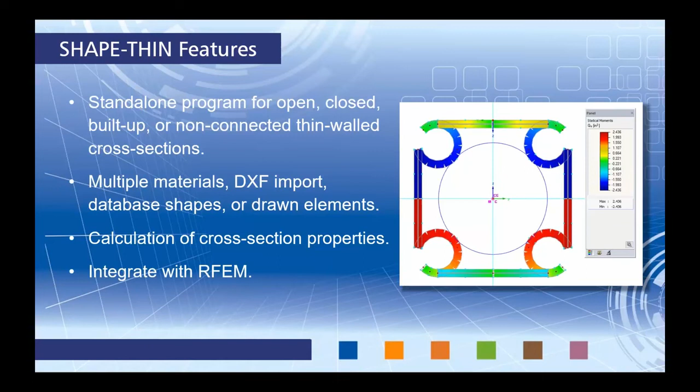Now you can create custom cross-sections with multiple materials. We can import a DXF file, which is what we'll do today. You can choose database shapes to create a built-up section, like from the AISC, the ADM, the CSA standard, or you can completely draw your elements yourself. Now the purpose of SHAPE-THIN is to calculate the cross-sectional properties, and then from here we integrate this custom cross-section into RFEM with our full structure.

Our other program, RFEM, is our finite element analysis program. This is where we'll be completely doing all of our modeling. Now, the modeling includes almost every material. We also integrate with BIM software such as Revit, Tekla, AutoCAD. You will load the structure and you can completely analyze it. From the analysis, we can get design internal forces, deflection, support reactions, and with this, you can take that information and utilize your own tools such as Microsoft Excel, for example, if you wanted to take that a step further to do design per a specific standard.

Now within RFEM, we can also utilize the add-on modules such as RF-ALUMINUM ADM. This has to do with a specific standard and providing you that code check. So for today, for example, we will take a look at the strength limit state design for unwelded elements according to the ADM standard. But we can also check serviceability limit state design. And with those two design features, we will input a lot of other information specific to the ADM standard that we haven't already entered in RFEM, such as unbraced lengths, limiting deflection ratios, and lastly, we can optimize the members.

So with that said, we can immediately jump into our first program, SHAPE-THIN. So with SHAPE-THIN, I want to go to File, Import, and this is where we can import a DXF file. So you just simply navigate to the file and click Open. Now, the first thing the program asks us is to create a cross-section name. And there are three different options down here. The first is the plastic cross-section properties. I will leave this checked, so the program will automatically calculate this with this custom section.

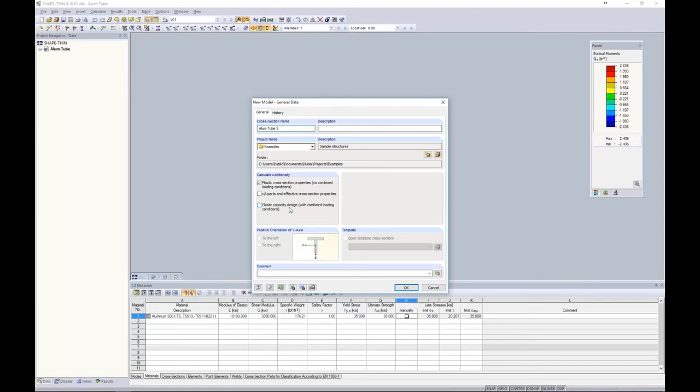The c/t parts I'll get into a little bit later, so we'll come back to this. And then the plastic capacity design really only has to do with Eurocode, so it's not relevant for the US or Canada, so we'll just leave this unchecked for now. So when I click OK, I should see my dialog box that imports my DXF file. Now, for the DXF template options, I want to choose the correct dimensions, which would be inches here. That's what my DXF file was created in.

And here would be my file from exactly the import. Now we also want to specify a reference material. So for this I can import a new material from my reference library, and you can see over on the left we have our filters.

For today I'm going to filter to metal, to aluminum, then we can filter to the ASTM, and here we have the ADM 2015. Now we have a very long and complete list of every ADM material you could possibly think of. What's also useful is to utilize your favorites group. If I check my favorites group, I've added a single material here that I can quickly access. Let's say you have several materials you access for several projects. You don't want to sift through that long list, so you can create a favorites group.

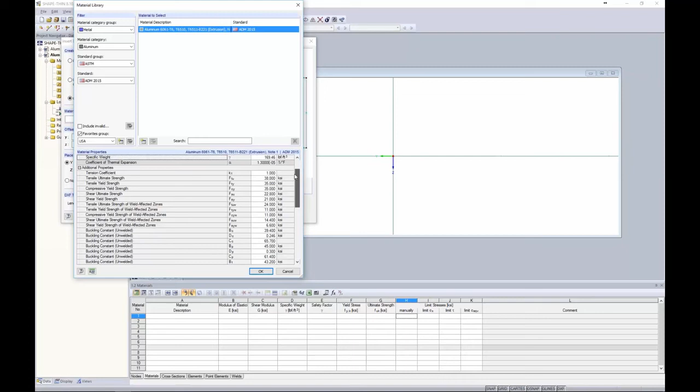For today, for this custom cross section, we'll use aluminum 6061 for extrusions, and you can see all of the material properties are given here. I click OK, and the next thing to do would be to click on a single point in this dialog box here on the left and where we want to insert it within the SHAPE-THIN program.

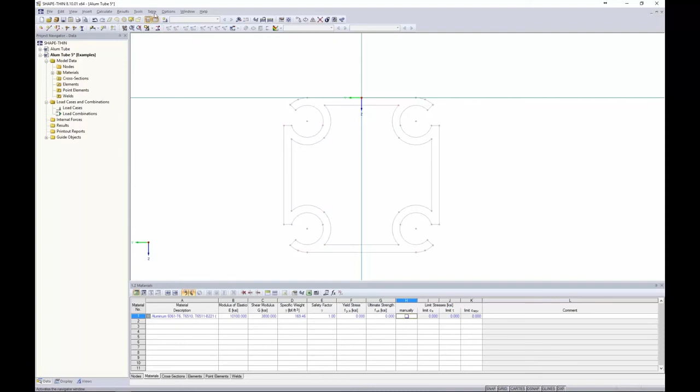So once I'm done with this, I can right click, I can expand this window, and we are now within SHAPE-THIN. So those of you who are familiar with RFEM or the other program RSTAB, the interface is identical to those programs, which is nice. So you're not having to learn a completely different process. Down here we have our tables to work with, we have our project navigator on the left, and we have our quick access tools up here at the top.

So this DXF file is just simply a background drawing grid. So what we need to do, though, is to draw these thin-walled elements to essentially create the shape of the custom cross-section. But we have quite a few features within this program that allow us to do that rather quickly. Now, the first option we want to go to is this new line up here in our tools. We have a straight line selected here, but I'm going to select a thickness of 0 inches. So all I'm going to do is to snap to one of these points on my arc and snap to the other point that's perpendicular to it.

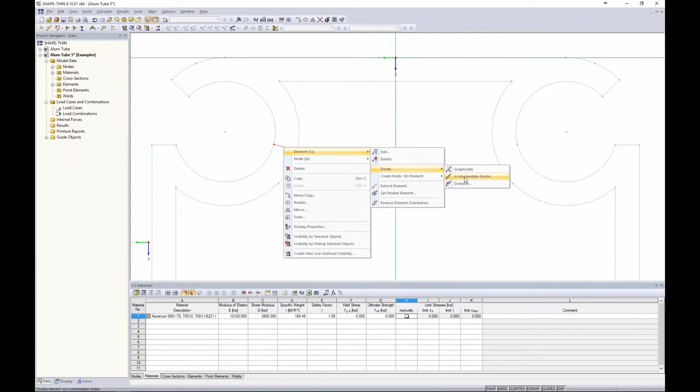Now, there are a lot of AutoCAD-like features such as snap points, perpendicular, parallel, that allow us to utilize these features quite nicely. So once I have drawn that, I'm going to highlight this element, I'm going to right-click, and I'm going to divide it by n intermediate nodes. Here I'll divide it by one intermediate node, and that immediately creates a center node. So now I can delete the left and right portions of the line, so I'm just left with this single node here.

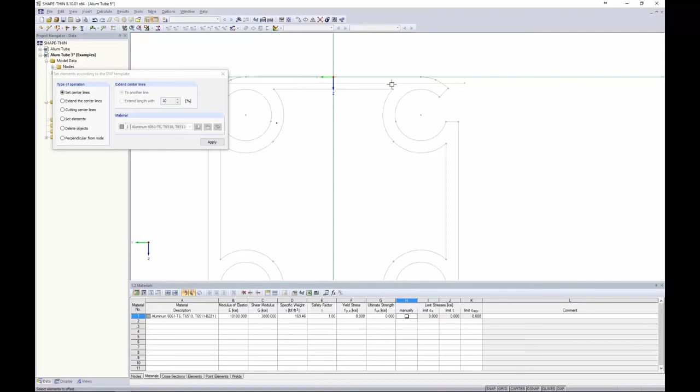Now, another feature under Edit, Set Elements with DXF Template. This is extremely useful. This has a lot of different operations that we can utilize to, again, just help us create these thin-walled elements that comprise our custom cross-section. For example, the Set Center Lines. With the Set Center Lines, all I need to do is to click 2 lines, and the program will automatically create a center line within that DXF file template. Now, I can do the same on all 4 walls here, and the program will automatically create them. Now if I right click, I exit out of there.

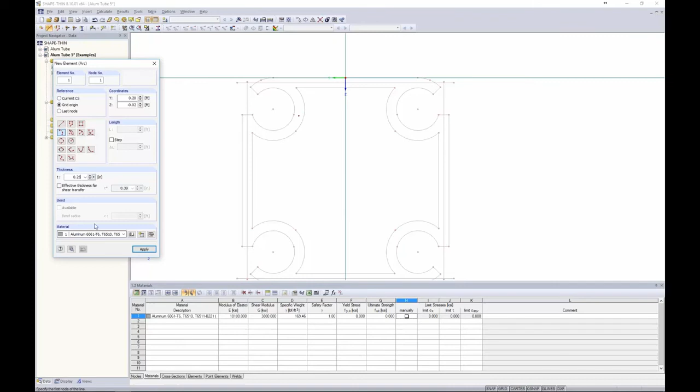So let's begin drawing our elements. What I can start with is a new line again, but this time we will choose an arc via 3 nodes. Now I do want to give it a thickness of 0.25 inches. Now my reference material is already selected here, but if I did want to change it, I could do so. And if I zoom in, I will select the midpoint between my 2 end nodes. My second point will be that node that we created right there in the middle, and then lastly we can snap to the end point here. If I right click, now I have created that arc element on the left corner.

In the similar fashion, we will choose a straight line. The thickness is remembered, 0.25 inches, and we can just snap to the center line of that DXF background layer that we created. And we will snap to any single point on our arc element there. Now the program's smart enough to recognize overlapping elements, so we don't need to worry about accounting for stiffnesses twice or anything like that. The program is smart enough to recognize that. Now we'll do the same thing at the bottom, and we'll snap to the top.

Now we could do that same process for all 4 corners, but rather we can select everything. And actually first let me utilize this tool Connect Elements up here at the top. Now the Connect Elements will make sure that all of these elements are connected to each other by placing a node on overlapping elements. So now we're going to select everything and utilize our mirror tool right next to that.

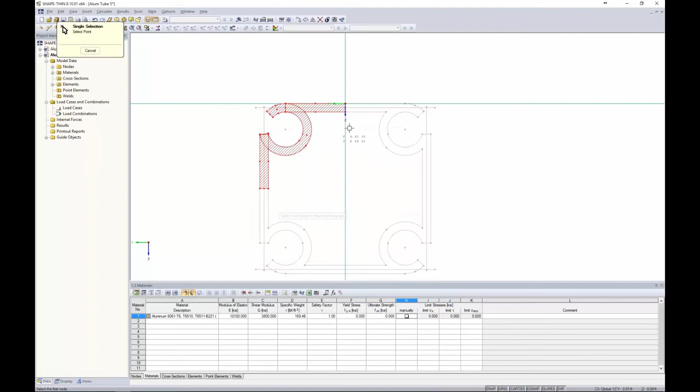With the mirror tool, we'll create a copy about the global z-axis, and then we just simply click a point graphically that we would like to mirror it around. We click OK, so now we automatically have that right side created. I will select everything in the upper half utilizing the mirror tool again, but this time about the y-axis, and I graphically select a midpoint here, and I click OK. So essentially that's all that we have to do to create this custom thin-walled section.

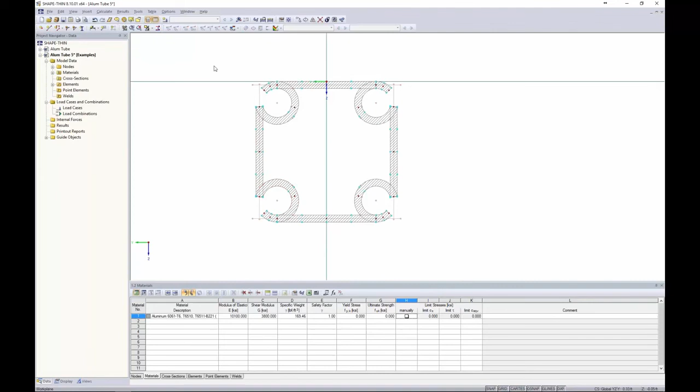Now, if I'm ready to calculate my cross-sectional properties, I can go up here to show results. The program says, okay, should I start the calculation? Yes, and immediately I get an error saying FY is not positive. Please check this in the table. So the program jumps to the problem where this error was being flagged, and I immediately see that my yield strength and ultimate strength are set at 0.

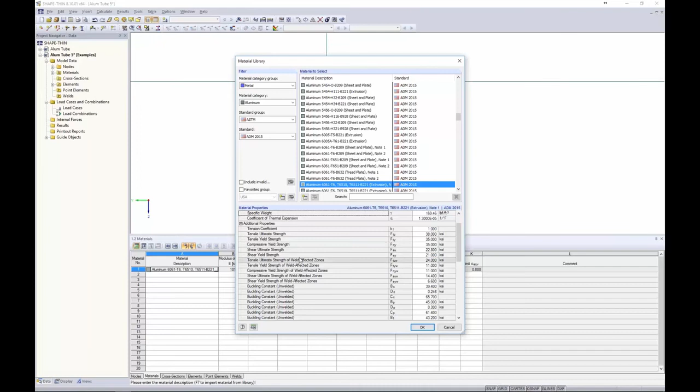Well, why is that? Well, when I take a look at the aluminum material, aluminum is slightly different than something such as steel. Steel has a very clear FY and FU, but with aluminum, we have both a yield and ultimate strength for tension, for compression, for shear. So the program doesn't know which of these strengths to relate in order to calculate the plastic cross-section properties. So that's no big deal. We can just maybe relate one of those, such as the tension strength of 35 KSI to the yield strength and 38 KSI for the ultimate strength. Now when we go to rerun our calculation, everything should solve just fine.

Immediately, graphically, we're shown here with our Results tab in the Project Navigator, and we can view our statical moments. Now, statical moments are the first moments of area. They're simply a product of area and the distance from the centroid. So we have QY and QZ. Then we also have the warping information. This is warping coordinates and warping statical moments. These are just geometrical quantities that are about the shear center. They're needed to determine warping stresses, so we can view this information graphically as well.

Now, probably what's most important are our cross-section properties, so we can view this in the fourth table here, and here is everything that we would be needing in order to export this out to RFEM and to incorporate it with the rest of our structure. So essentially, we could save the model here and move forward with RFEM, but there's one more thing that I want to cover. In the aluminum ADM module, local buckling is checked. For those of us who've done aluminum design, we know that local buckling is very important for these thin-walled sections. So if I were to bring the shape as it is now into RFEM, local buckling will not be checked.

And that's because I need to implement these C sub T elements within SHAPE-THIN. And C sub T elements are just width to thickness ratios. Now, in order to implement C sub T elements, they can only be added to these straight line segments here. They cannot be added to these arcs. So if I was concerned with local buckling of one of these arcs, or had some other different shape where I had a rather large arc that I'd like to check local buckling, then it's suggested that you create multiple straight lines that compose those arcs, and then you can create the C sub T elements.

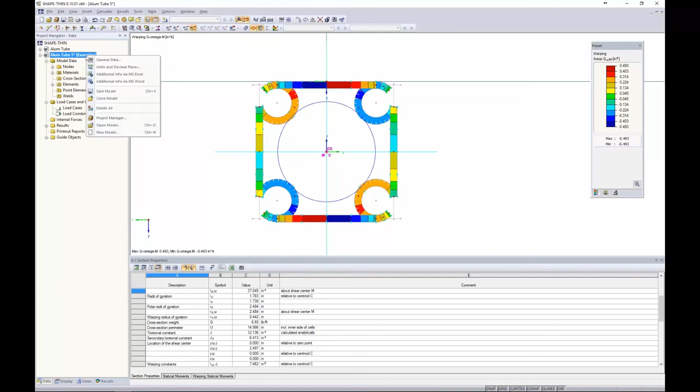So back under the Data tab, I can right-click on my model name and go under General Data. And here is where I said we would get back to C sub T parts with an effective cross-section property. So I click OK, and the program automatically adds the C sub T parts over here on the left. Now, it tries to add in some of the C sub T parts, but being a rather complex section, I prefer just to select all of these and delete them and add them in myself. I think it's just a little bit more clear and shows what's going on.

So we have a new table here called cross-section parts for classification according to the EN. Now, completely disregard the Eurocode reference. That is truly if you just want to run an analysis and get classification for these C sub T parts. What we're doing is just adding these C sub T parts to be brought into RFEM for checking of local buckling of our wall elements.

So what I will start with is right-clicking within my graphical view here, and I want to show the numbering. Under my Display tab, I'm going to scroll down to Numbering here and unselect Nodes. So now I'm just viewing the numberings of the elements themselves. So I'll begin with the left side with element 4 and 14. And the restraints, I want to check these both as restrained. This is a closed shape. Now, if this arc didn't exist and this was an open end here, then we would want to leave this as unrestrained. So that's important because when it comes to aluminum design, it depends on how the local buckling is checked.

Down at the bottom, we have element 12 and 17. Again, these are both restrained. For the right side, we have element 8 and 18. And for the upper portion, we have element 2 and 7. So if I were to go and run the results again, we can start the calculation.

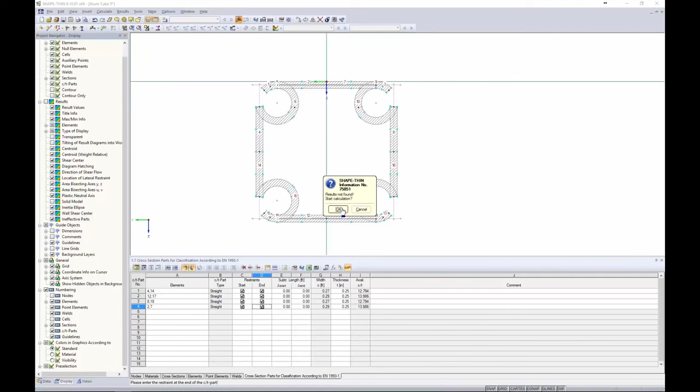I get an error saying no load case was defined. Well, why is that? For the C sub T elements, you have to define some type of arbitrary load. So it doesn't matter if we're bringing it into RFEM. It's just a requirement of the program that we come up here and we create a new simple load case. We don't even need to give it a description. It's dead load. That's fine.

Then in our table down here at the bottom under loads, for member number 1, we're just going to give it an axial tension force of 1 kip. It truly means nothing. It's just to create these C sub T elements.

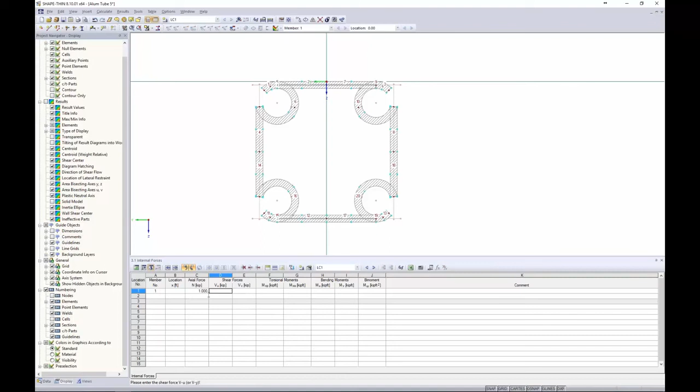So then we will go ahead and run our calculation again, and we should be right back to where we started with the results available with statical moments, with warping, but you'll notice now we do have some additional options here for stresses. That's just based on that 1 kip tension that we put in, so it's not really relevant. But we are still able to calculate our sectional properties here, and those C sub T elements are available.

So now we can completely save this file, and it's important that you save the file with the results. Otherwise, in RFEM, it will give you an error. I'll show you in just a little bit that the results have not been ran. So we can go to File, Save, and now we're ready to jump into RFEM.

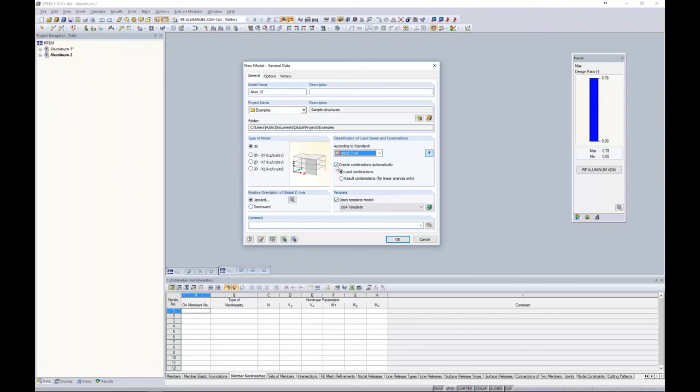So this would be our other program, RFEM, our Finite Element Analysis program. And the first thing we want to do is to give it a name, and we'll call this one aluminum 10. The model type is 3D, and we can calculate the load combinations according to the ASCE 7-10. I can uncheck this if I'd rather manually put in those load combinations. I click OK, and then the program will launch my model to begin.

Okay, so as I said, for those of you who are not familiar with RFEM, this interface looks identical to SHAPE-THIN. Obviously, we have a lot more going on, though, because we have much more capabilities within this program. But what I want to do is to begin modeling our aluminum structure. Now, I could typically start by drawing individual members, but I want to show under the Tools option, Generate Model Members, the option to create a 3D hull automatically.

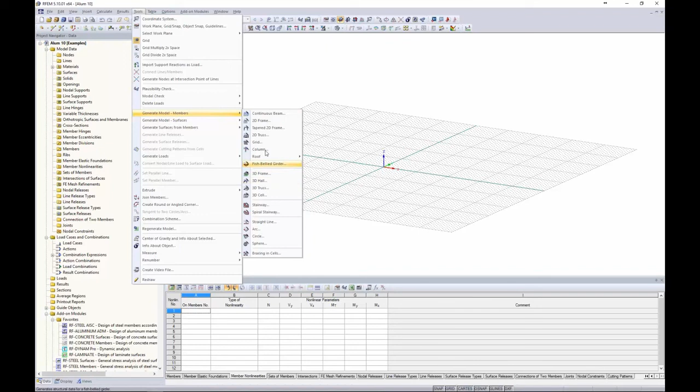So you'll notice that we have many other options throughout here, but we'll begin with this 3D hall, and up pops the dialog box. So we're going to create a structure like this, all within this dialog box. So what we can do is begin by entering in some of these variables that the program's asking us for. Now, I already have created the structure before when I was practicing for this webinar, so all of these variables are already input, but we'll go through them one by one. The program remembers the last settings for the file that you had open, so that's why they're already populated.

So the length on the L side here, we can give it 4 bays, and then the total length, we can set this at 48 feet, so each bay will have a length of 12 feet. Now the width, which would be the front and back end here, will also have 4 bays, but we'll give this a length of 32 feet for each bay to have 8 feet. The roof, we will give it 4 bays as well, which you can see it's automatically set to what we have set for the width.

Now, the height of the eaves, which we can see H sub E here, we can set this to 8 feet. Now we can skip the roof pitch. That doesn't matter because it will be automatically calculated when I type in the height of the ridge H sub R of 12 feet. Coupling members is the first option here, but you'll notice if I choose purlins, purlins allow me to place these connecting purlin members not necessarily where the columns are, but in between them. For today, we'll stick with coupling members, which are at the column locations.

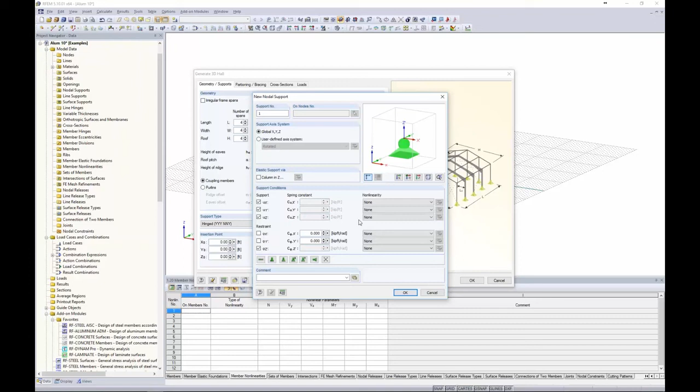And then we can get into our nonlinearities, things like partial activity, sliding, friction—that's really no problem at all. It's all included in RFEM if we want to get that detailed with our support conditions. For today, we'll stick with the hinge type application, and we'll insert this at 0.000 within the model. Now we just move to the partitioning and bracing tab.

For the bracing, I have this checked, and the program will place this X bracing at the bays that I specify. For example, the gable front—I'd like to place that in bay number 2. The gable rear will also be set to the second bay. Now the sidewall front, closest to us, we can set as bay number 3. The sidewall rear, bay number 3 as well. And we can also add X bracing along our roof—again, we'll choose bay number 3.

Moving on to cross-section. So we've defined the geometric properties of this structure, but we now need to assign these specific cross-sections. The first one is frame columns—that would be the front and rear columns.

We will import a new cross-section from our cross-section library. We have all of our rolled cross-sections, thin-walled, massive, timber. What's nice is we have a lot of built-up sections as well, so any of these shapes applicable for your structure, utilize RFEM for it. We'll see in a minute how to import a ShapeThin section for sections not available here. We can also open up the hollow sections and filter over on our left according to the ASTM and the ADM 2015. Here are all of our shapes directly from the standard.

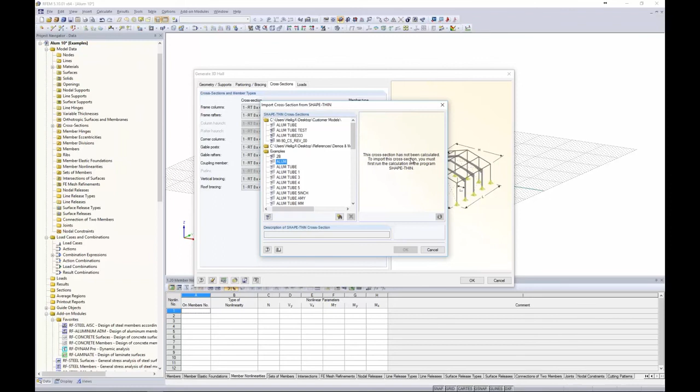The corner columns, however, this is where I want to import my ShapeThin file. In the same sense that we imported our hollow section, down here in the lower right corner, we can import the cross-section from ShapeThin. If I open this up, this is where I was saying we have some different sections maybe you've created, and if you don't save the results, you get this error just telling you the results haven't been calculated—you must go back into ShapeThin and run the calculation.

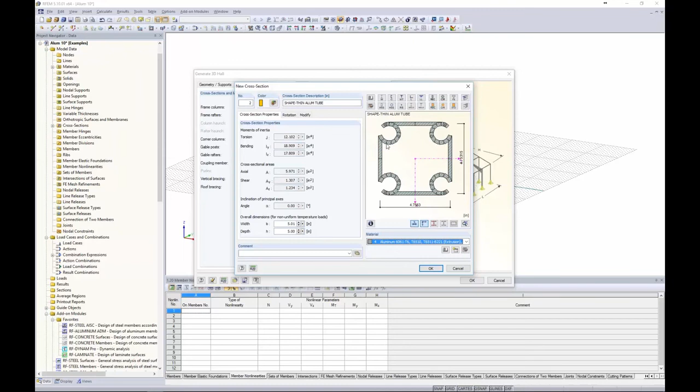So for us today, we did save the calculation. Here is my aluminum tube cross-section. I click OK, and now the program will ask me what material I'd like to utilize. I've already added in some different materials here, so we'll choose the 6061 extrusion. That's why in ShapeThin, it doesn't necessarily matter what material you use there—you can always override it within RFEM. But here is our shape exactly how we created it in ShapeThin. I click OK.

Now the gable posts, which would be my front and rear posts here, I'm going to utilize my shape thin. I don't need to redefine that. It's now available as one of the cross sections within this file that I can always select from my drop-down box. The gable rafters, we will leave this as the 8x4x1/2.

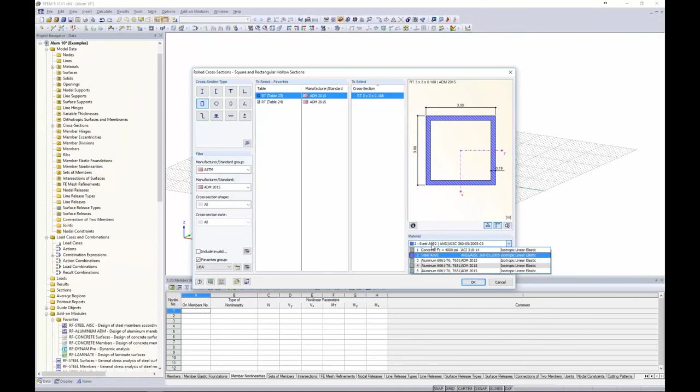Now the coupling members, I do want to import in a different section here. It will be a hollow section, but this time from my favorites list, we will choose the 3x3x0.188, and of course the correct material here for the pipe and tubing aluminum.

Now, lastly, we have our vertical bracing and roof bracing. So this is our X bracing. We will create our last cross section from our parametric thin wall.

Now all of these, all you need to do, for example the round bar, is to put in your geometric properties, such as 1 inch in diameter, and the program will automatically calculate all of those properties for us. So from this drop-down we can now select our last material for bar rods and wires. We click OK, and we click OK.

And lastly, the roof bracing, we now have that round section available to us. Now notice the member type. The member type beam is anything that's a beam or a column. Nothing too special about that.

But we do have many other options to choose from here. For example, the program automatically set the coupling member to a truss type beam or truss type member. Now this will release the moment at the start and member ends, so you only get shear and axial transfer.

The vertical bracing and roof bracing, it might be quite common to set this as tension only, which is fine. I more so recommend that for something that's a cable or a rope or wire that truly doesn't have any compression capabilities at all. But for us today, since we're using a rod, it has a small amount of compression stability. So what we could set this to then is buckling. And what buckling will do is take the member out of the analysis if it exceeds the Euler buckling limit. So I suggest to do that over tension when you have a rod type member.

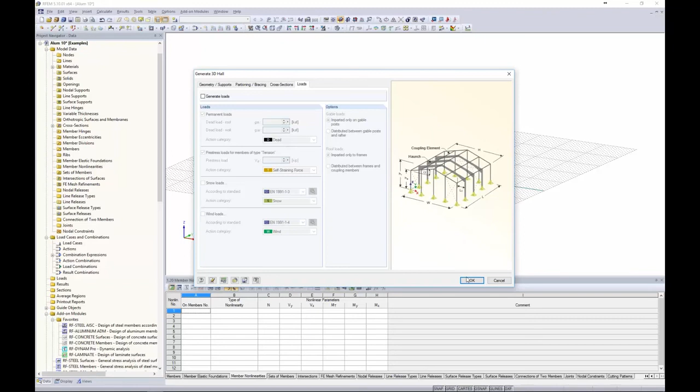So once we're done with all of this, we click OK, and you can see that our structure is generated. Now we will move on to loading.

For this, we want to create a new load case with the quick access tool up here at the top, and the first load case we title it dead. We do need to assign it to an action category. Action categories are important so that the program knows how to put these specific load cases into the ASCE7 load combinations, which are important for load factors. The self-weight is automatically calculated with dead load, so we will leave this as checked.

Now, creating a new load case, we will call this one Wind 1, and the action category we will set this as Wind. Notice self-weight is unchecked because we certainly don't want to account for it twice. And one more load case, we'll call this one Wind 2, for wind in the other direction, with the action category of wind. Now the combination expressions, if we jump to this tab, the program will automatically create both LRFD and ASD load combinations.

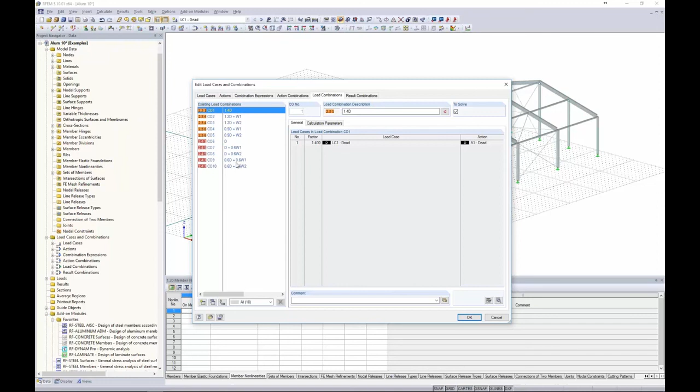And more importantly, under the load combinations, we can see these specifically listed out. Here's our LRFD load combinations and our ASD load combinations. We'll get into this in just a little bit.

So for now, I want to make sure under my drop-down box that I am under the dead load case, because now any loads that I apply will be applied under LC1 dead. So I'd like to apply a roof dead load up here, and I could apply it as member loads, but...

...rather let's utilize some of these tools that we have. Under tools, generate loads from area loads on members via a plane. This will bring up the dialog box to apply this load. So the first thing to do is to specify the load direction, and we will apply it in the global Z direction. The program changes the picture down here to let us know exactly how that will be applied.

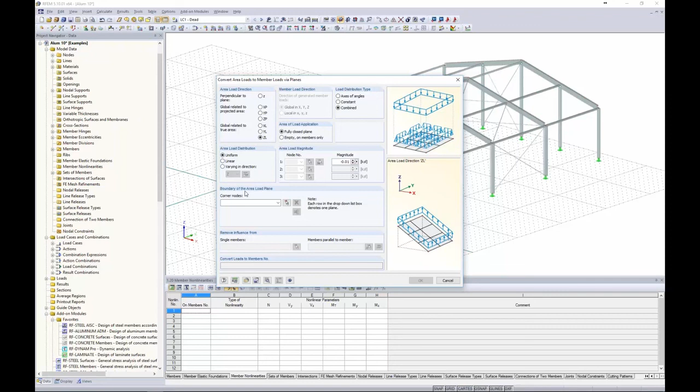And we're just going to apply a magnitude, pretty small, of negative 0.01 kips per square foot. Now the boundary area of the area load plane. So for this, what we want to do is to select first our left side of the structure, and we can do so with 4 clicks.

Now, instead of leaving this application, we can also do the right side of the structure as well. So these area loads need to be in the same plane, but you can do multiple area loads within the same application. Now I click OK, and you'll notice that all of my members, which are highlighted in red, will have the load distributed onto them based on this area load.

So let's say I really only want to apply this load to my rafters and disregard all the other members. We can choose the members parallel to members option to remove the influence. For example, if I want to exclude my purlins, all I need to do is select a single purlin and all members parallel to it will be disregarded.

Now I can do the same thing for my braces with a couple of clicks here. So now only my rafters are highlighted, so those should be the only members the load will be applied to. I click OK, and automatically I am given my area load. What's nice is I can also right-click to display it separately so I can see the magnitude and direction of exactly how the area load is applied to my structure.

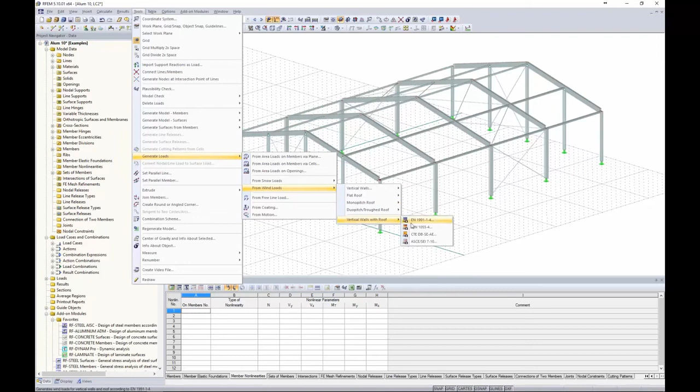Moving on to wind loads, we also have a wind load generator under Tools, Generate Loads, but for wind loads for vertical walls and roof according to the ASCE 7. With this application, we can apply wind loads for general type structures, such as this one shown in the picture, according to Case 1 and Case 2 from the ASCE 7. We can also do the minimum wind loads from the standard as well.

What we need to do is specify a few parameters up here at the top, such as exposure category. We'll leave this as B. Is the structure enclosed? And our basic wind speed, we can leave this as 70. Now the building mean roof height for our example today will be 10 feet. The other factors here, I will just leave as they are.

Now we need to define the base geometry and the roof geometry. It's important to recognize how we need to define this. For example, point I on our base must be below point A on our roof. If you don't define the geometry correctly, then the OK will be grayed out at the bottom, which flags you that you probably haven't defined the geometry quite right, and you can go back and adjust that.

For example, the base geometry, all we need to do is select our 4 bottom nodes here. Then for our roof geometry, we are selecting the 6 top nodes, but we're making sure to keep the same orientation that the dialog box asks us to.

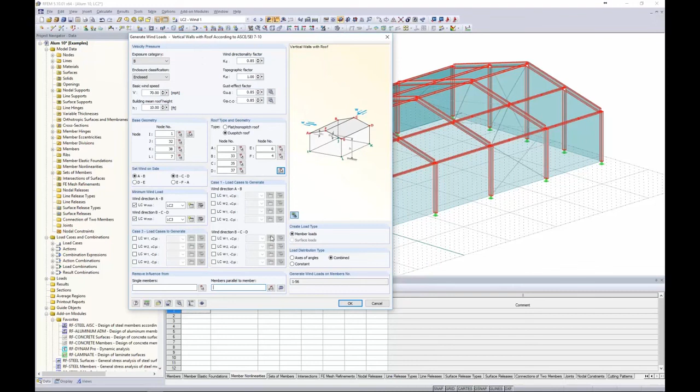Now again, we can select this option. All of the members in red will be utilized for the wind load, and if I choose to remove the influence from, you'll notice that perhaps I don't want to include my braces. Here is where I can unselect some of these braces, and then all the members parallel to it will be excluded from the wind load. So now we just have the influence on all of the red highlighted members.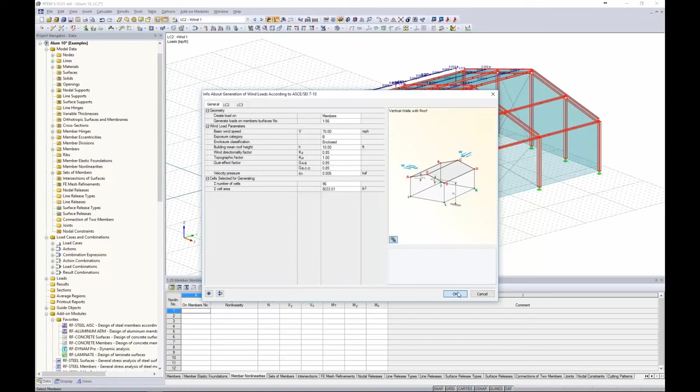So now I can click OK, and I forgot to mention one thing. Let me double click on this. I am not going to generate Case 1 or Case 3 for this example today. I'm just going to apply the minimum wind loads according to the ASCE 7 for LC 2, which would be the first wind load case that we created. I'll set this in direction AB, which if we toggle our picture, we can see exactly how this is coming into our structure, and load case 3 will be the other direction. So just for simplicity for today's example.

Now you can see those wind loads applied for LC2 and LC3. We can always right-click to group those together as an area load as well if we want to make it a little bit of a cleaner look. So realistically, we are done loading the structure. You can scroll through these different load combinations and see how both dead load and the wind loads will be applied, including the load factors.

Now, before we're ready to run an analysis, there's several features that we need to cover from the ADM. This comes from Chapter C in the ADM 2015, Design for Stability. This section C2 really refers directly back to the AISC Chapter C stability requirements for the direct analysis method. I did a webinar completely devoted to going into greater detail.

Today, of course, we'll touch on many of these features, but if you see something that you want to explore in a little bit more detail in regards to stability, certainly refer to our YouTube channel and AISC Design, where I go much more into stability requirements.

But according to the ADM, a lot of similarities. I think if anything is unclear in the ADM, it's kind of a given to refer back to the AISC, which I'll do today. But there are a couple differences as well. There are 5 requirements that the ADM calls out for, and that's flexural, shear, and axial member deformations. That just means that the designer must determine whether connection deformations are significant and if they should take that into account with the analysis.

Now, the second requirement is the second order effects of P big delta and P little delta. So P big delta, the ADM states, is included in most structural analysis software, which I think we all agree with. P little delta, however, isn't. The ADM goes on to explain that maybe your structural software doesn't have this, but in order to determine the required strength for compression members, P little delta must be included.

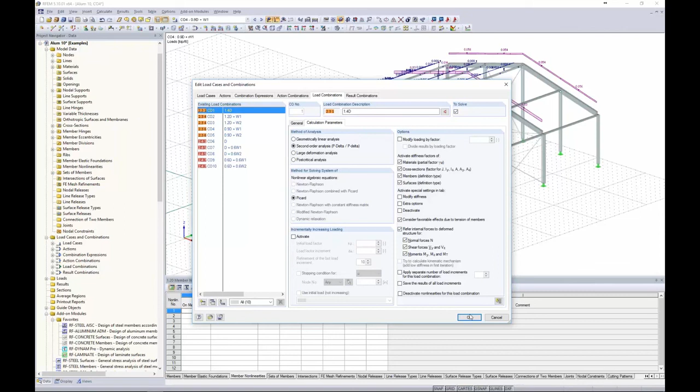Now, result combinations are nothing more than an envelope solution for our individual load combinations. And the calculation parameters will always just utilize whatever we have set the load combinations to. So it will also utilize the second order effects. Okay, so that is all that we want to cover with P delta.

Now, to move on to geometric imperfections, this comes from section C.2.3. Geometric imperfections are there to anticipate buckling shapes and displacements of our structure. Now, erection tolerances are not specified in the ADM, and it's really up to you as the designer to determine what those erection tolerances should be. But the ADM goes on to explain that you can use notional loads to account for these geometric imperfections, and how you do this is with a fraction of the applied gravity loads.

Now, it's not too clear here on how to do that, but I think it can be said that we can refer back to the AISC for these notional load applications. And within the AISC, section C2.2b, here is our notional load equation. It's 0.002 times alpha times Yi. Now, alpha just depends on if we're running an LRFD or ASD design, and Yi is our gravity load for that specific load combination applied to that member.

Now, notional loads should be applied in both orthogonal directions and in both the positive and negative directions, because we really don't know the behavior of this structure under the applied gravity load, so we need to cover all of the bases. Now, the second question is, which load combinations do I apply this to?

It's typical to not apply notional loads to other load combinations that have lateral loads, such as wind load or seismic loads. We really only want to apply these notional loads to gravity load combinations, and there are further specifications in the AISC: if our second order analysis over our first order analysis is less than 1.7, then we can exclude the notional loads from those load combinations with applied lateral loads. Today we're assuming that we meet those requirements, so I only want to apply these notional loads in RFEM to my gravity only load combination.

So how do we do this then? Well, it's actually quite easy. I uncheck my loads here, and I'm going to highlight all of my vertical members here.

Now, geometric imperfections really are to account for a column out of plumbness. There are some other stipulations that you can maybe add in, pre-cambers, which we'll see in just a minute, but for today we're really concerned with column out of plumbness in terms of geometric imperfections.

Now, I want to not highlight my braces here, so if I hold down my control button and select those brace elements, only my columns are left highlighted, and I can use my drop-down box to create a visibility by selected objects.

Now, the next thing I want to do is right-click on the member to show my local axis system of my members. You'll notice that most of them are going in the same direction except for our interior columns here. It looks like the Y and Z axis are opposite of what my columns are on my outer edges. Well, because this is a square member, it really doesn't matter if we rotate this.

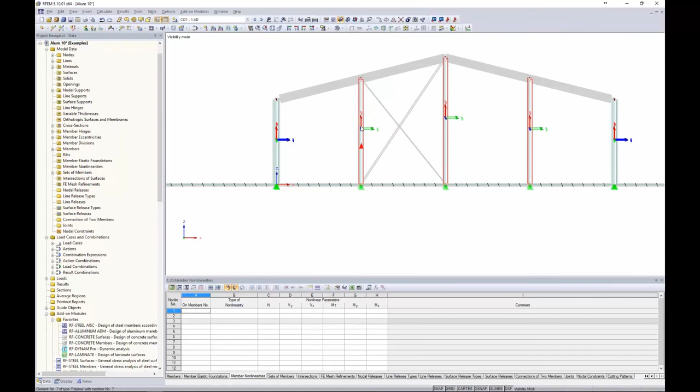Now, we can do this by highlighting our members. We can right-click under Member to edit, and whenever we created our structure out of the structural load generator, it rotates those columns 90 degrees. Well, we can set this back to 0. We click OK, and now you'll notice that all of my local axes are going in the same direction.

So why is this important? Well, if I highlight all of my members, again, my columns, and I go under Insert, Loads, Imperfections, you can see the option graphically here. Now, except I forgot to do one thing. I am going to go back to my load cases and combinations, and I'm going to create a new load case. And sorry, you want to do this before going under the imperfection loads that I just showed you.

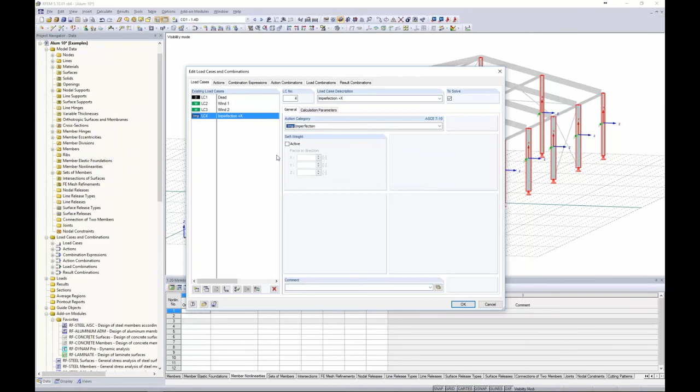So we have dead load, wind load, but we want to create a new load case here, and we'll call this one imperfection positive X. The action category will use the drop-down box imperfection. Now, imperfection positive X is only one out of our 4 cases, but I'm going to start with this load case here. So I click OK, and now going back to Insert, Loads, Imperfections, we can choose the option graphically here. When I open up this dialog box, you can see all my members were automatically input based on my selection here.

Here is my drop-down according to the AISC 360-10. And here is our equation that should look very familiar. This is just what we saw in the PowerPoint of 0.002 times alpha times Yi. Now alpha, we can choose whether that's LRFD or ASD. The Yi will simply be the gravity load for that specific load combination. Now here's where I said you can add in a pre-camber if you want, which can be dependent on the gravity loads as well. But for this, we will forego that since we're really only concerned with column out of plumbness.

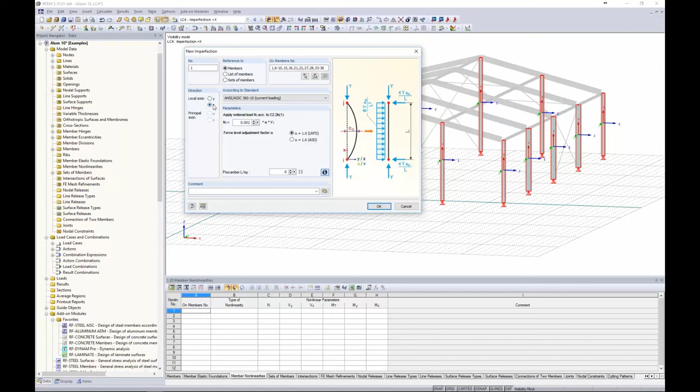Now the next question is, how do we apply this to our members in terms of the local Y or Z axis? Well, remember I named this imperfection positive X, so I'm referring to the positive global X direction, which in turn is the positive local Z direction of our members. So for this, I can leave this as the local Z option. I click OK. And now when I turn this to wireframe view and zoom in, here is my imperfection that I have just added.

So going back to the load cases and combinations, this imperfection X, I'm going to make a copy. The advantage of making a copy is that it will copy all of the loads that we have applied to this LC4 for LC5 as well. But this time I want to rename it as negative X. I'll make another copy of our original imperfection and call this one positive Y. And lastly, one more copy, and this one we will call negative Y.

Okay, so going back to RFEM, we use our drop-down box here to select imperfection negative X. Remember, it copied the same imperfections. We have it in the same direction, so we need to account for the negative out of plumbness now. So how do we do that? Well, we can highlight all of our members, double-click on this imperfection, and simply put a negative in front of our 0.002. It's as simple as that.

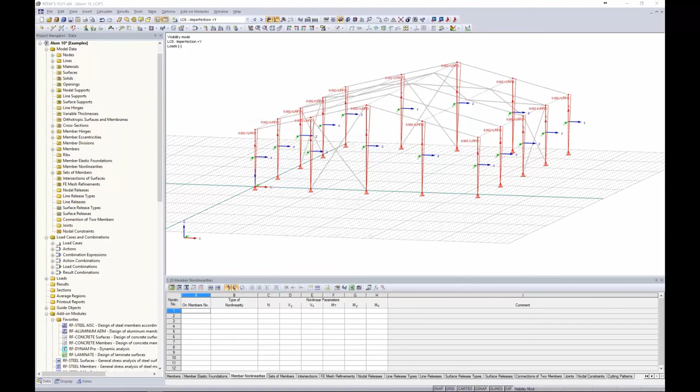We scroll to the imperfection positive Y. We highlight all of our members. We double-click on our imperfection here. Now our positive Y global direction is the negative local Y direction for our members. So we switch this to the local Y direction and we put a negative in front of the 0.002.

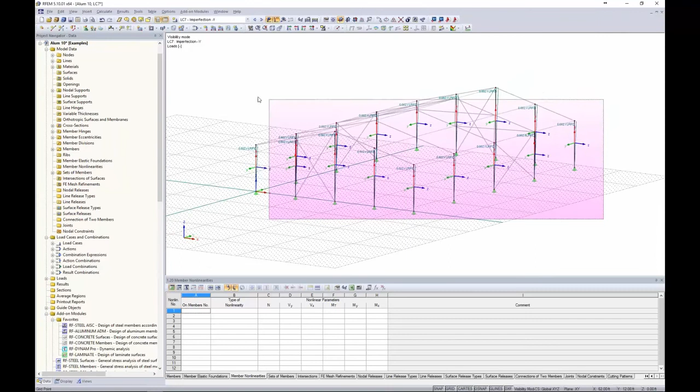I click OK, so now you can see that out of plumbness is applied in the global Y direction. Now doing this for the last time, we will select all of the members. We can scroll in to double click on our imperfection to simply change this to the local Y direction and leave this as a positive 0.002. I click OK, so now this is being applied in the global negative Y direction.

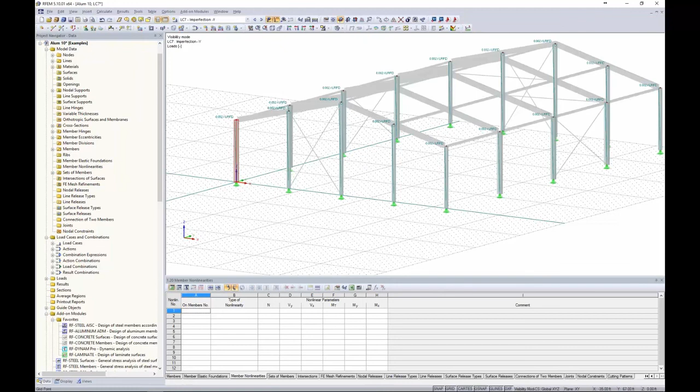We can right-click on our members to turn off the local axis system. We can go back to the rendered view here. And now you can see that we have our imperfections available. But if we go into our load cases and combinations, these load cases are here, but I jump to my load combinations and I don't see anything to do with imperfections. So how do I know that these imperfections are being applied to these load cases?

Well, right now they're not. We need to specify which load combinations to apply it to. Under the combination expressions, we have this option here called imperfection load case. So what I want to do is to select this option, and up pops the imperfection load case dialog box for the settings. Here are my 4 imperfections that I defined.

So what I want to do is to uncheck a couple of these options. Now I want all imperfection load cases to be considered as alternative. I definitely don't want to apply all of these together under one load combination, so they should alternate. Now the other thing I want to do is to choose this option subject to specific load cases.

For my imperfections, under the option Never with Load Cases, if I expand on these details here, this is where I can select the option to never use this imperfection with any load combination that has a lateral load applied to it. So this is what I was saying in my PowerPoint. If you want to exclude these geometric imperfections for load combinations that apply lateral loads, this is how you do it. Notice we did not check the dead load.

So I click OK. Now I want to do the same thing for the rest of these imperfections, and if I hit my F8 key, it will simply copy the cell before it into the cell that I'm currently in. So now when I click OK, the other option I want to do is I want to select differently for each combination expression. Now for my ASD load combinations, perhaps I don't want to consider these imperfections for serviceability checks. Well, by leaving this checked, those imperfections should not be applied to ASD load combinations, but only my LRFD load combinations.

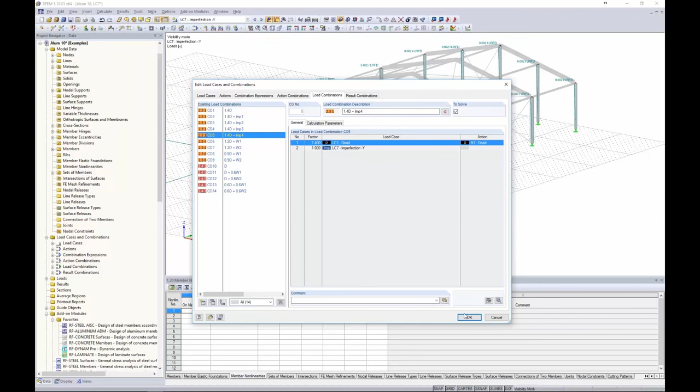So that is all that we want to discuss regarding geometric imperfections. Now, points number 4 and 5, which were modified stiffness and uncertainties in stiffness and strength. This refers to our tau sub B factor for flexural stiffness in section C2.4. This completely refers back to the AISC, once again, section C2.3. This tau sub B factor is an iteration based on the equations here based on our required axial compressive strength and our axial yield strength. So this really all depends, again, on these axial loads through our member. And this tau sub B factor should be applied to our flexural stiffness.

Now, the 0.8 factor should also be applied to stability stiffness, and this comes from section C2.5. In my opinion, stability stiffness refers to flexural and axial stiffness. There are ways to apply this to shear stiffness as well, but like I said, I think for stability stiffness and what we're concerned with today, we're just going to keep this applied to flexural and axial and not shear stiffness. So again, how do we use the program to take this stiffness modification into account?

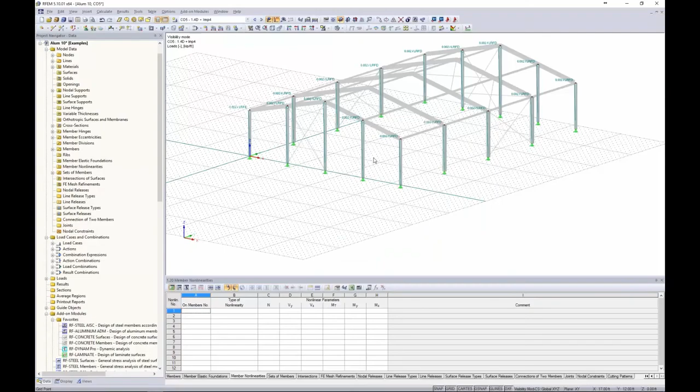Well, back in RFEM, if we take a look at our model here and we highlight all of our members, and actually let me cancel out this visibility mode and turn off my loads here. We will highlight all of our members, and we want to right click on the member to edit it. We have a nice tab here called Modify Stiffness. Now right now the default is always set to none, but if we use this drop down, you'll see the AISC 360, Chapter C, and here is our tau sub B factor.

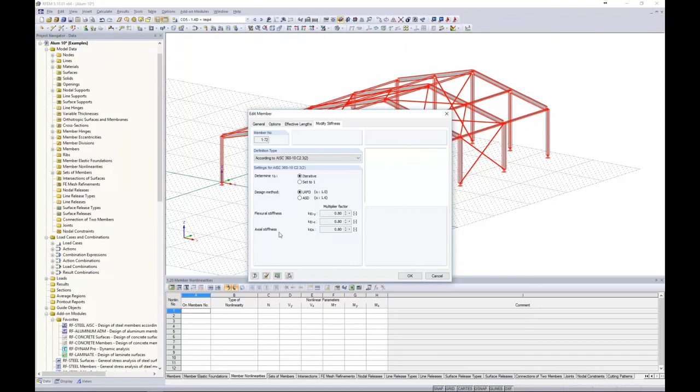Now when it's set to iterative, it will refer to those equations within the AISC and the ADM standard to calculate what our tau sub B factor should be and apply this to our flexural stiffness. Now the 0.8 factor down here you can see is automatically applied to both our flexural stiffness and our axial stiffness. So this will now be applied to all members, to all load cases, to all load combinations automatically.

Okay, so I think that essentially covers everything that we need to do in regards to the ADM requirements. So we are now ready to run our analysis. We can go up to Calculate, Calculate All, and the program will run through each one of our load cases and all of our load combinations as well as the result combinations. Now, keep in mind we are running a nonlinear analysis. This also takes into account the nonlinear analysis for P-delta effects.

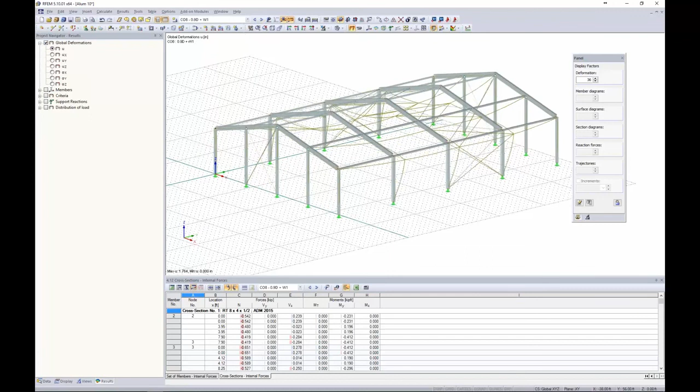So once this is done solving, our results will be available in RFEM, and we can see here we now have a results tab available in our project navigator. So the first thing to view here are our deformations, and we can scroll through the different load cases and load combinations to view how our deformed structure should look. Now, probably what we're also interested in is member internal forces. So we can take a look at these for any of our members.

Now, for example, I can highlight this frame here and make a visibility based on only these members. We can view our axial loads, for example. We can take a look at some of our shear internal forces. Perhaps we want to take a look at these strong axis bending moments. We can always increase this member diagram. And for any of these internal forces or strains and stresses, we can always right-click on the member, choose a single member here, this column, and choose the results diagram.

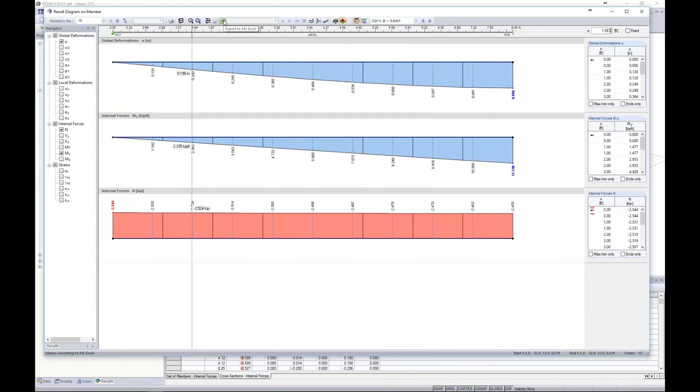Now, the results diagram is just a little application here where we can continue to add in some of these internal forces to take a look in a little bit more detail at what's going on along the length. We can easily scroll between the different load combinations up here at the top. We can add these to our printout report. We can even export all of this data directly to Microsoft Excel.

The support reactions are also something that's available here that we can view. So again, you can take all this information, whether it is in these tables here or graphically, and do your own design with your own external tools. So this really sums up RFEM and the full analysis capabilities.

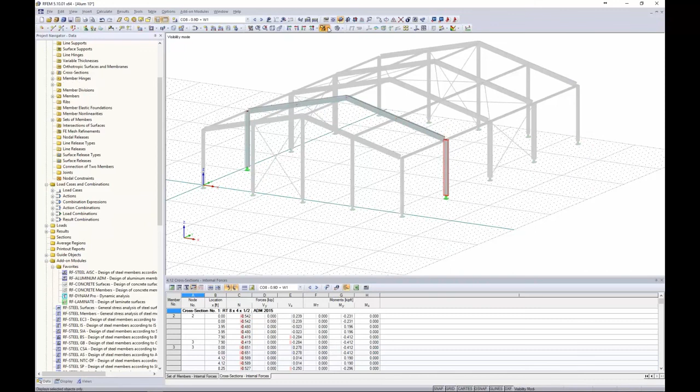Like I said, though, we want to take this a step further, and we want to utilize our ADM module to do aluminum design. So for this, I'm going to just uncheck the results being displayed. I'm going to cancel my visibility mode, so we just have a nice clean picture of our structure here. So over on the left is our long list of add-on modules. We also have these available here in our drop-down box where they're categorized a little more clearly in terms of the different materials and capabilities. For example, under aluminum, we have our RF-ALUMINUM ADM module.

So this module is nothing more than a dialog box. Now, I don't have to worry about remodeling any of my members, redefining materials, cross-sections. All of that is taken from RFEM. But like I said in the PowerPoint, we just need to specify a little bit more information to get that specific code check per the ADM standard. Now, there's a few things that I want to clarify before we begin.

In this drop-down box, we can do design according to both the 2010 and 2015 standard. We have both ASD and LRFD. If we choose ASD and we go down into our details, you'll notice that we have the two options here for structure type. That's either building type or bridge type. But if we choose the LRFD 2015 design and go under the details, that option is no longer there, and that's because we only do building type for LRFD design.

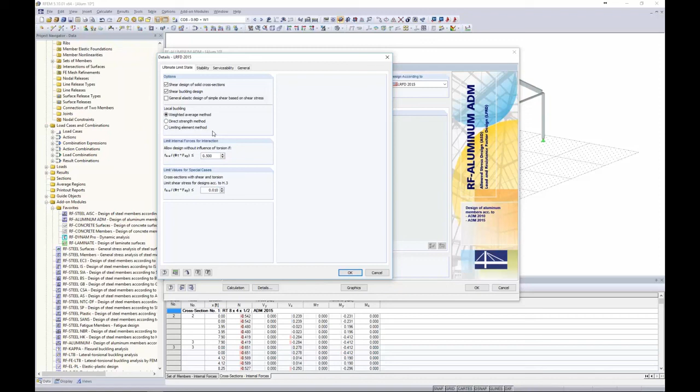A couple other things to note. This is something new as of just a release maybe a couple weeks ago: local buckling. We now have 3 different options for local buckling. The weighted average method is from section F.3.1, the direct strength method is from F.3.2, and the limiting element method is from F.3.3. So you have the option here on how you prefer to check your local buckling. We feel the weighted average method is the most accurate method, so that's the default. Now, I won't go through every one of these details, but I do want to touch on a couple other things. Serviceability we'll actually get into later on.

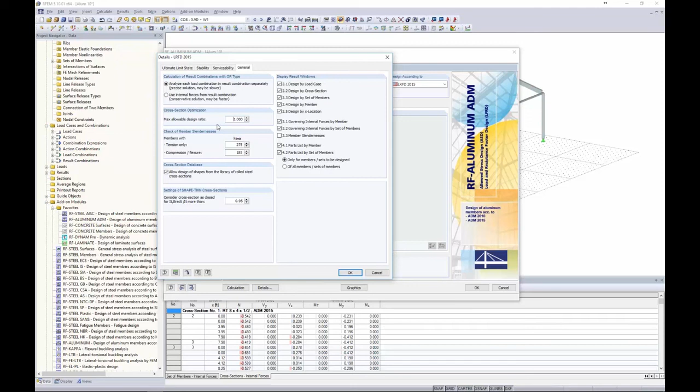And under the General tab, this is where we can set the max allowable design ratio. So right now the default is set to 1.0, but for design, maybe something like 0.8 or 0.7 is a little bit more realistic when we're looking at utilization ratios. And this is also relevant for optimization of our members as well.

So the first thing we want to do is to go up to File, and I like to rename my case. And I'm going to call this one Columns and Braces. So we're going to design our vertical members first. I click OK. All that I need to do is to select graphically my members that I would like to design back in RFEM. So I'm just going to include all of those vertical members, including my braces.

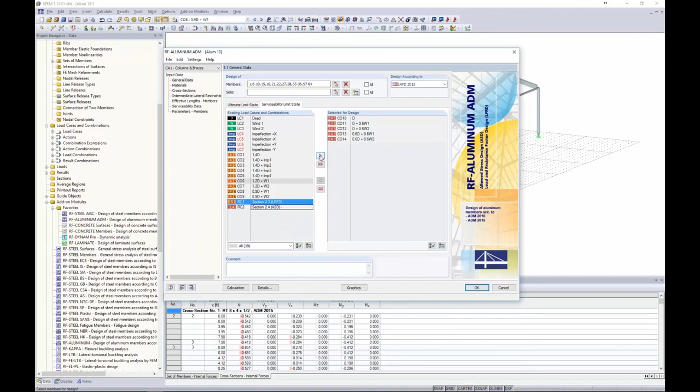Now my ultimate limit state, I just want to select the load combinations from RFEM. You'll see all of our imperfections are available here. I don't have to redefine any of that. So there are my LRFD load combinations. For serviceability, we'd like to choose our ASD load combinations. Now we just simply need to move down the list.

So our materials, again, brought in from RFEM. If you are trying to utilize concrete or steel or any other material within the aluminum module, it will give you this error: invalid material. But if we take a look at any one of our aluminum materials, well, here are all of our material properties that will be used for design.

The cross sections, again, are brought in from RFEM. We can see here our 8x4 tube, and here's our SHAPE-THIN section. So we can even do design of those custom sections within the aluminum according to a general type cross section.

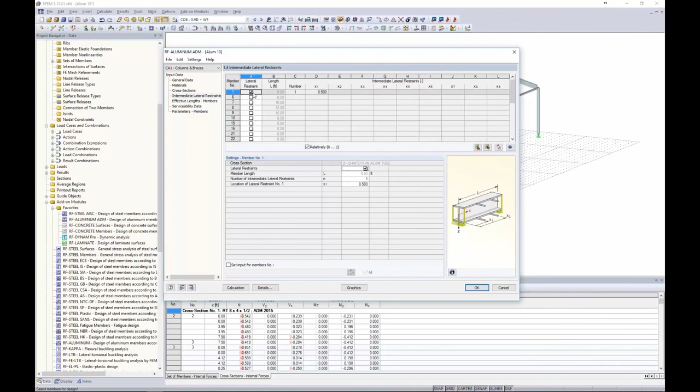Intermediate lateral restraints. So this is just any top and bottom flange bracing, so to speak. So we can check this checkbox for lateral restraint, and you can see here member number 1, all of the tables are always synced up to our RFEM model. So you'll always recognize where you're at within your structure when you're taking a look at these different applications here.

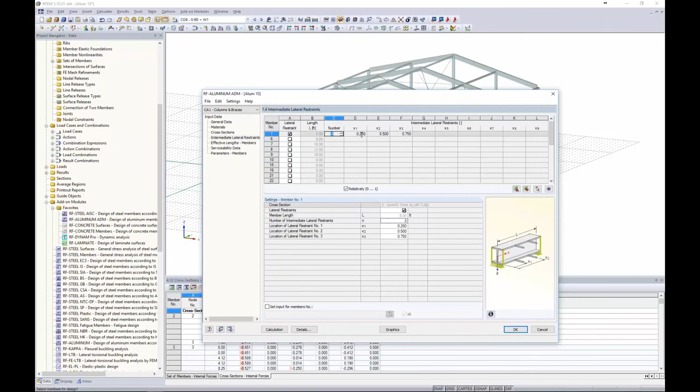So for our lateral restraint, if we had some top and bottom flange, which really isn't applicable for our tube, but maybe you have an I shape such as this, you can add in those restraints as a function along the length of the member.

The effective length. So we check strong axis buckling, we check weak axis buckling, we also check the lateral torsional and flexural torsional buckling. Now, the buckling about the strong axis and weak axis, our effective length factor, you can see here the default is set to 1.0.

Well, the ADM in Chapter C tells us that we can actually leave the effective length factor set to 1.0 when we're taking into account all of these other considerations with modified stiffness. This is the same thing as what the AISC gives us as well. So we will take advantage of that, and we will design according to Chapter C and leave all of these K factors as 1.0.

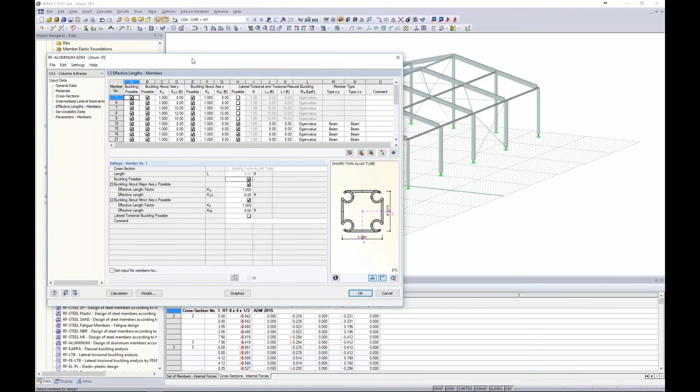Now, the unbraced length, this is something that's very important. Within the program, this will always default to the full member length. And for our vertical members here, we won't be adjusting any of the unbraced lengths, but in my next example, we will be taking a look at how we can adjust those.

Lateral torsional, flexural torsional buckling. You'll notice that my SHAPE-THIN sections are unchecked for this. Well, this all relates back to my Details tab. Under General, you can see here settings of SHAPE-THIN cross sections. The cross section will be considered closed when our Bredt torsional resistance over the overall torsional resistance is more than 95%. Now you can adjust this ratio, and then you will be allowed to do lateral torsional, flexural torsional buckling. But for now, that is the reason why these are unchecked.

For a square tube-like member, torsion is probably not so much of a concern. Now for the other hollow sections here, 8x4 members, we also could uncheck torsion if we wanted to, or we can leave this checked just to take a look at it.

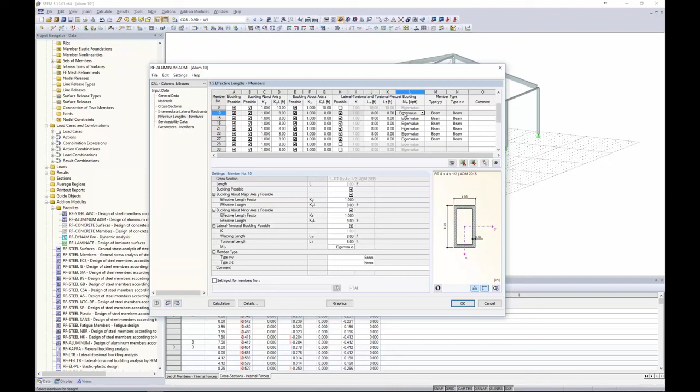Something that's interesting though throughout this module, M sub E, which is the elastic lateral torsional buckling moment. Well, right now the default is set to eigenvalue. So what the program will do will be to actually run an eigenvalue analysis for each one of these members to determine what the elastic buckling moment will be. So this is by far your most accurate option within this dropdown.

But if you want, you can also check this option according to F, and it will use the equations from Chapter F, Section 4.2.5 to determine what that M sub E value is.

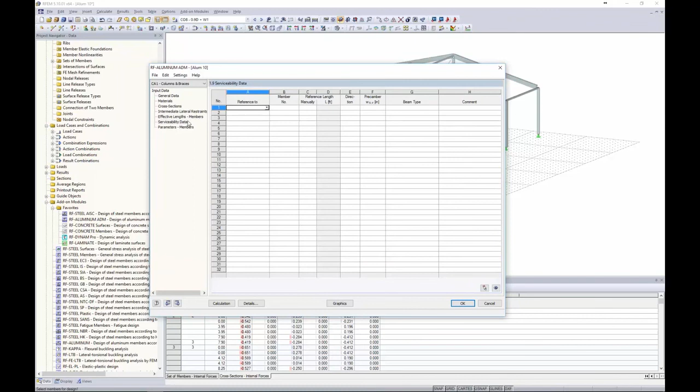Moving on to serviceability data. We first want to reference our member, and graphically we can select all of our members at once if we want to check them all for serviceability. You don't necessarily have to check all of them, you can just choose a few. We can also add in the reference length, which defaults to the full member length, but we can manually change this if we'd like to. I'll show that in my next example.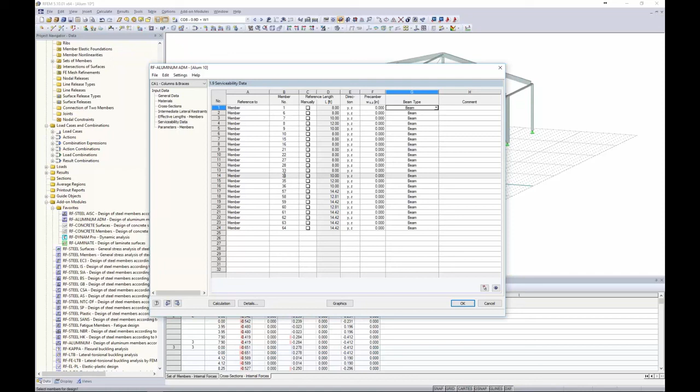We can add in a pre-camber here if we'd like to, and lastly we just specify whether this is a beam or cantilever. So the question is, what is this deflection check comparing it to in terms of our limiting deflection ratios? Well, that's under the Details tab again, under Serviceability.

Within Serviceability, we need to define whether the deformation is relative to the shifted member ends or the undeformed system. Is this relative or absolute? For this example, we'll leave this as relative deformation. The serviceability limit, the deflection ratios, defaults to L over 360 for simply supported members and L over 180 for cantilevers. You can easily change these ratios if you'd like to. And lastly, the direction of the pre-camber we put in here, is it within the local Z-axis or the local Y-axis?

Once we've specified those, the last table to take a look at is parameters members. This is a reduction in cross-sectional area. For member number 1, if we had some type of connection at the member start and/or end where our cross-sectional area is being reduced, we can put in the net cross-section area here. You can also define the eccentricity of the connection in the local X and Y directions, as well as the length of the connection - what distance this area reduction should be taken into account for, both at the start and end. That new area will be used for the internal forces at that location. We won't be utilizing that today.

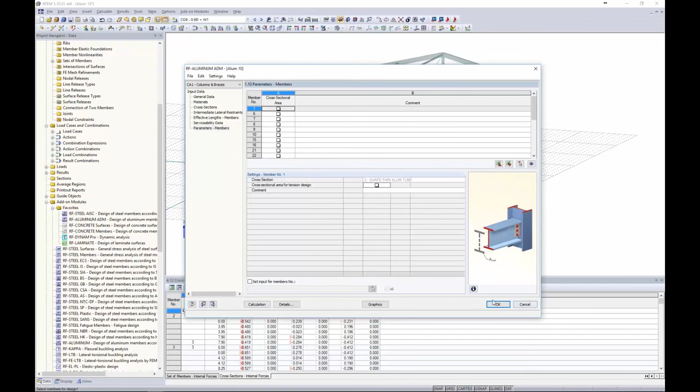Now that we have entered all of this information, we are ready to run a calculation. Instead of waiting for that calculation to run, I'm going to pull up another model. It does take just a minute because of our shape thin sections, and we can jump into the current add-on module. This is essentially what you'd see after you run an analysis.

You get our results tables available here. You can view the design by load case, the design by cross section. Here we have our 8x4 tube, here's our shape thin section, and just like I said, because we brought in those C sub T elements, here is where those individual elements 1, 2, 3, and 4 are all being checked for local buckling. That's a very powerful feature - we can bring in some type of custom cross section and still check something like local buckling.

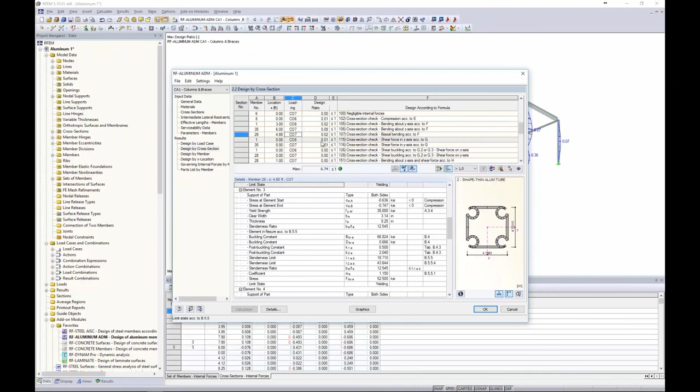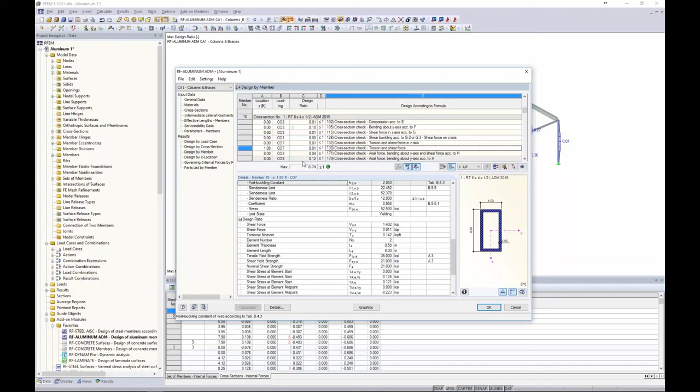Now we can also view the design by member, and keep in mind that as we're scrolling through this different table, the program automatically syncs it to our view in the background, and that big red arrow shows you where the controlling internal forces are. We give you the code check for a specific member for everything within the ADM - all the references directly from the code, such as A3, G1, as well as every variable that goes into calculating where that specific code check came from. We give you the controlling result down here with our green smiley face because we are less than 1.0. Lastly, we do have a material takeoff list as well.

We can also view everything graphically. So if we go to our results table here, we're still within the RF-ALUMINUM ADM - that's why I don't have any of my internal forces here. We're just viewing our code checks for serviceability, for example. And then we can view our code checks for our ultimate limit state design.

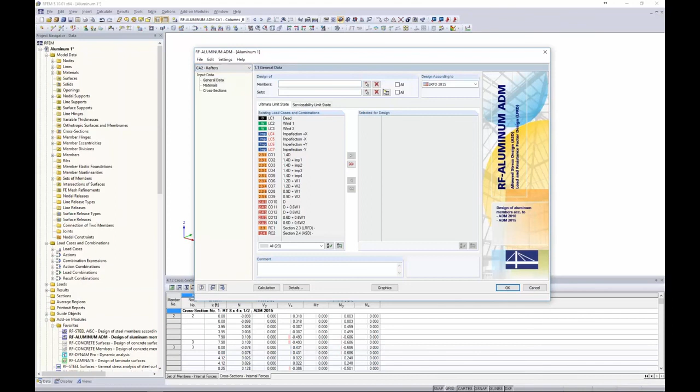Jumping back to the add-on module, I have one last quick example to show you - the Rafter Design up at the top. I want to explain the difference between members versus sets of members. So I'll create a new case here, and we'll call it Rafters, so we're not losing any of our data from case 1. We can always use our drop-down box for our columns and braces. For our Rafters, I want to begin by designing my members here, along this column line, and we click OK.

Now my sets of members. So what is a set of member? Well, when we created this structure from the structure generator, the program places this faint red line around my entire continuous member here. This is a set of members. Now you can also manually create a set of members back in RFEM by highlighting it, right-clicking, and choosing to create set of members.

But essentially, this entire rafter will be designed as one continuous member. Now notice it doesn't even necessarily need to be in a straight line. It does need to be in the same plane, but the fact that it bends where the pitch of our roof is no problem. So I just want to show you the comparison of the members versus sets of members and how essentially our results are the same.

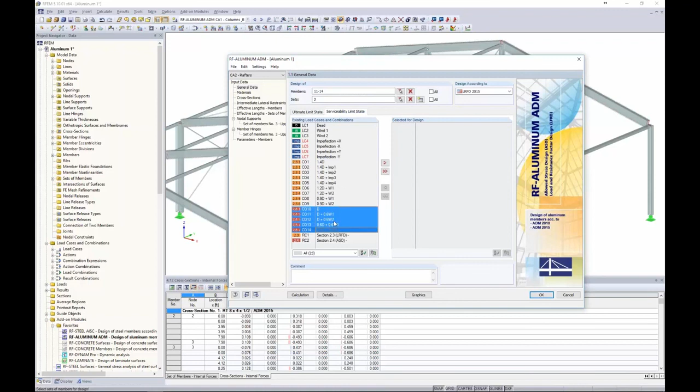We will again select our load combinations for our ultimate limit state design from LRFD. Serviceability will be our ASD load combinations, and then we just move down our list. Our materials aren't changing. Our cross sections are not changing. They're all the 8x4 tube. We don't have any intermediate lateral restraints, but the effective lengths we do need to pay careful attention for.

So let me jump back to the graphics to zoom out here. For our individual members, now you'll notice we have two separate tables here, members versus sets of members. So we'll first begin with our members. The strong axis buckling defaults to the individual member length here.

But we have nothing restraining it along this entire continuous member length in the strong axis direction. So this is where we actually want to override this and set this as 32.3. That is the distance from one end to the other because we have nothing, again, restraining it. I hit my F8 key and that will override all four of these members.

Now my weak axis buckling, I'm going to leave this as the individual member length. I think that this is correct. We have these purlin members framing in here, so our weak axis is inevitably restrained in that direction. The lateral torsional and flexural torsional buckling, again, I'm going to assume that my purlins are restraining it for that type of buckling behavior, so I will leave this as the individual member lengths here.

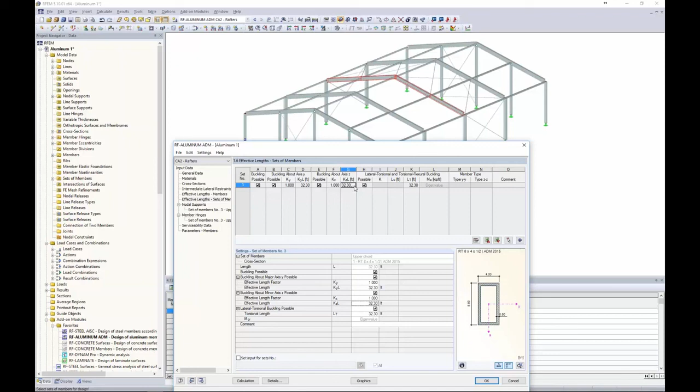Now moving on to sets of members. Well, we can see here if this is being designed for one continuous member, then the full member length for my strong axis buckling is set at 32.3. This is correct. If we take a look at weak axis though, it defaults to the full member length, but in reality we have these purlin members that maybe we would like to set the length a little bit shorter here for the weak axis buckling.

Now the same goes for lateral and flexural torsional buckling. We can set it as the smaller length because of those purlins framing in. The nodal supports, this is only available for sets of members, and I think that this can be a powerful feature when we're designing sets of members.

What this does is it places a support at both the member start and the member end here, but what we can additionally do, so node number 19 and 23 are just what we would see back here, node 19 and node number 23. What we can additionally do is define where these purlins are framing into the member as fork type supports. So we simply select these different nodes where these purlins are framing in, and the program has a few restraints here, and if it is truly a fork type support, we're going to leave the default here so we don't have any restraint in the global Z direction.

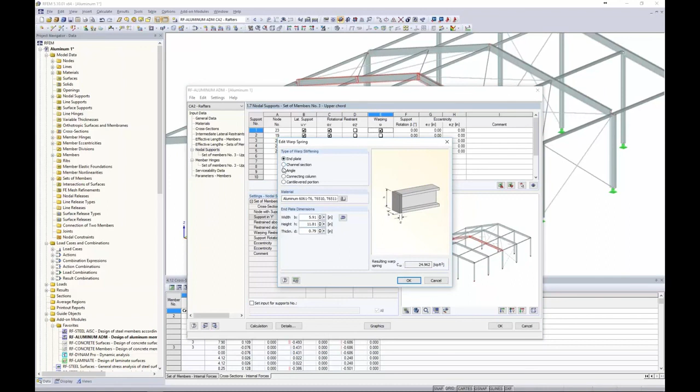But even more so, you can actually specify warping restraint here. So if I check one of these check boxes and I go to this details, well, this is where we can take into account warp stiffening, whether that's an end plate, a channel section, or an angle. So this is huge because it will be taken into account with the design of the member. Now this is not available for individual members, and of course this isn't applicable for a tube shape, but again, if we had some type of I section such as this, you can see how this would be beneficial.

But one thing to note, if I utilize this nodal supports and I go back into my effective lengths for my sets of members, well, you'll take a look, my weak axis buckling and my torsional buckling have now been grayed out for my unbraced length. And that's because all of that information is now being taken from the nodal supports here. So you have two options. You can manually put in that information, or if you want to define things like warping and such, you can just enter in that information here and the program will override it.

The member hinges here, this would just be for a single set of members, either the member start or the member end. If we had a shear release, a moment release, a warp release, we could specify that here.

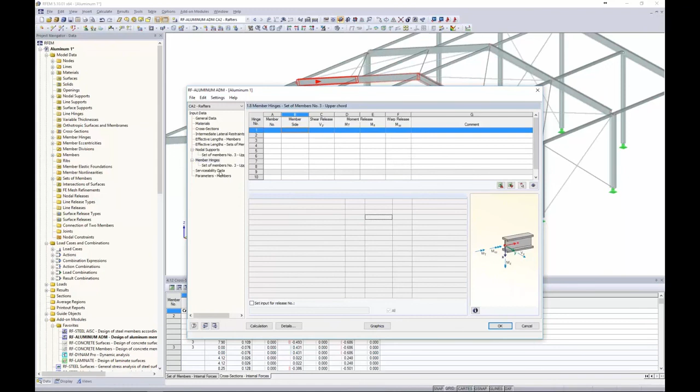For serviceability data, we want to first select our individual members to compare, and we click OK. Now I'm also going to select from my drop-down sets of members, so we need to make that distinction here, so we can select our second set of members there. Now, the reference length, these all need to be the same if we're trying to compare the sets of members to the individual members. So for example, we would want to override this here as the 32.3, using our down arrow key and F8 to override all of those lengths.

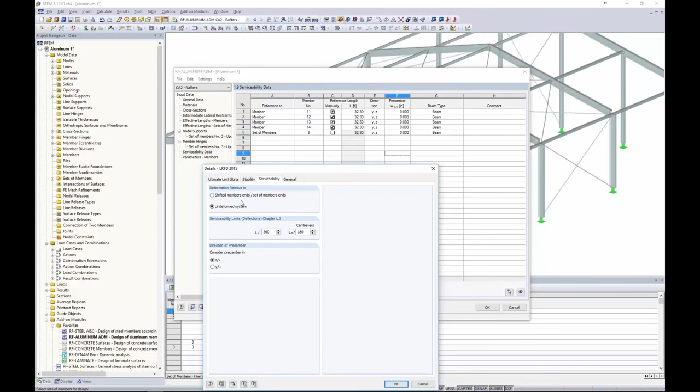Now, one more thing before running our calculation, under details and serviceability, I have to change this to the undeformed system. There's no way that I can compare these individual members to my set of members based on these shifted member ends. It's just not comparing apples to apples, so we want to change this to the undeformed system. I click OK. We're leaving the parameters empty as is, and we can run our calculation.

This should solve rather quickly, just taking the internal forces from RFEM into our add-on module. Now you should see a few other tables available. For example, we have design by sets of members versus design of members. And of course we have all of our data available here.

But probably what's most efficient in comparing these two continuous rafters is just to simply go to our graphics. If we go to our graphics and I take a look at my individual members that we design versus my set of members, and I'm looking at the ultimate limit state design, it looks identical. Maybe slight differences because we don't have a symmetric structure here, but overall it's really the same code check.

We can do the same thing for serviceability. Everything looks almost identical. So that's just comparing members versus sets of members.

Now, one final thing to take a look at: if we go back to the module, after we run our analysis, we do have the option here to optimize. All that we have to do is go back to the cross sections. We can see here our max design ratio is shown as 0.74.

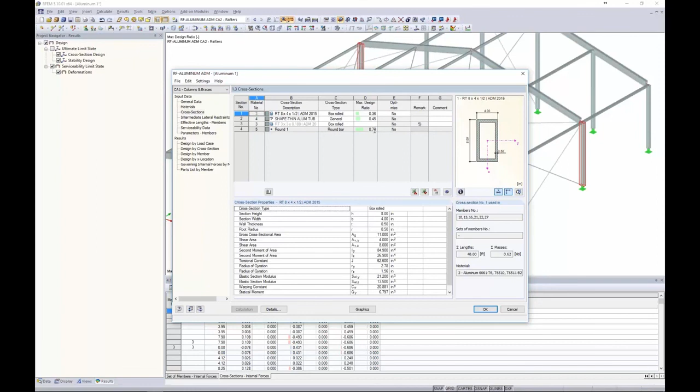We can even go back to case number 1 where we can see all 3 of our members and their code checks. And you can choose to optimize here from the current row, which will simply take all of our rectangular box sections and optimize according to weight to get as close to that 1.0 ratio as possible.

Or we can utilize a favorites list, maybe we have just a few members that we would like to optimize from. So if we choose from current row, we just rerun the calculation, the program will optimize, and then we can export those with the right button, exporting those cross sections back out to RFEM. So that's essentially how you can optimize within the program.

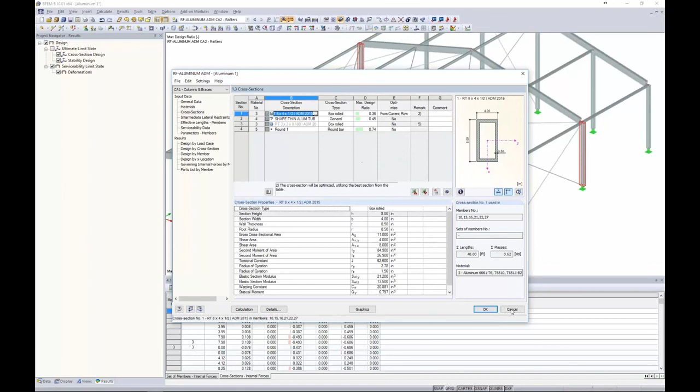Okay, so that sums up the webinar for today. I just have a few closing remarks. I know that I flew through all of that information.